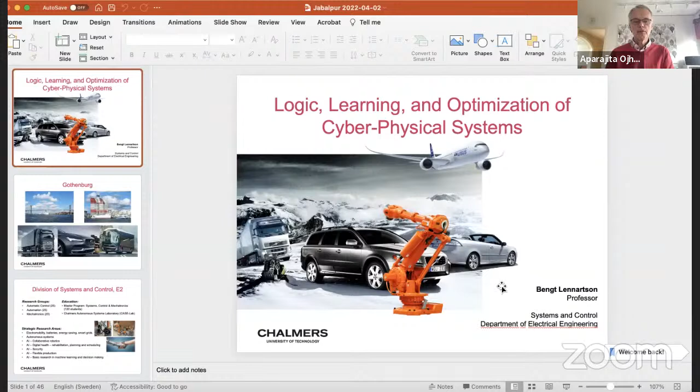Presentation view, at least in PDF, could be problematic. Let's see, now we have that. So although it's not so nice, let's see if it works if I start with the presentation mode here. Okay. So the title is instead Logic, Learning and Optimization of Cyber Physical Systems. I hope that sounds okay. Now it does not work to make the switch, so I have to go back. Let's try one more time, because it's of course better if I can use that mode. Now, okay, finally.

So, based on that title, I would like to start giving a very short presentation also of my city. Just one slide here. You see that we have the sea close to us, and also a lot of vehicle industry. We have actually 3 main contributors. Volvo Trucks is the second largest truck company in the world for heavy trucks. Volvo Cars is not so big, but it's still significant, and especially for safety functionality, it has been world leading, you can say. And it's interesting, when I go to Australia, for instance, I have been transported with a Volvo bus.

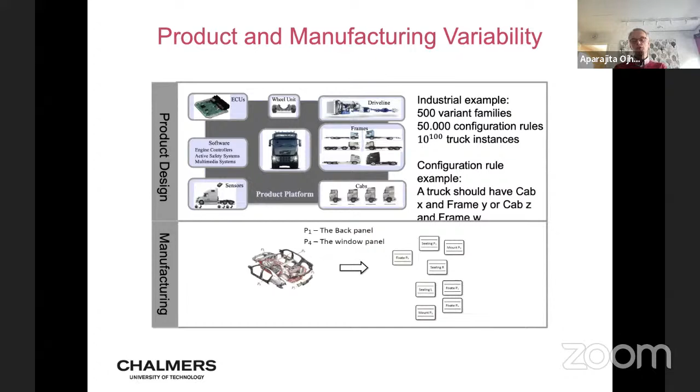In manufacturing, we are also focusing quite much on sequences of operations in factories, how to make that more systematic, how to get different views of operations from product view, production view, etc., to get a better understanding. So that was a little bit of a background, and now the question is, how can we support with some more basic methodology around this? One thing is temporal logic, which is a logic where we extend also with temporal modalities like always, eventually, next state, etc.

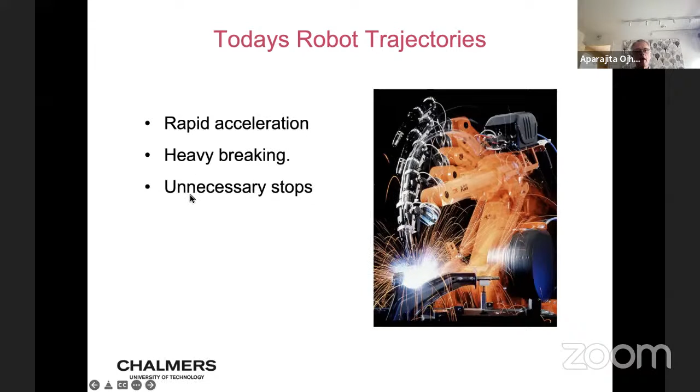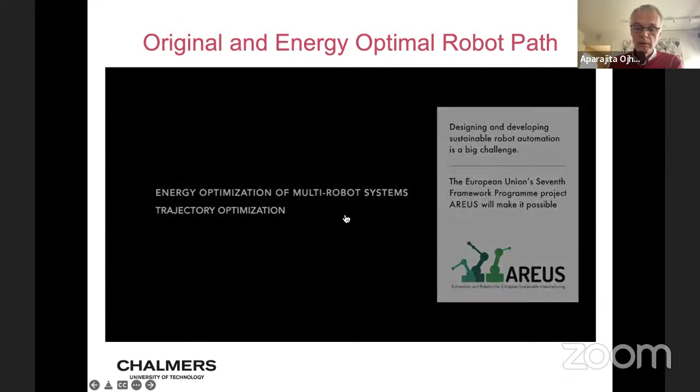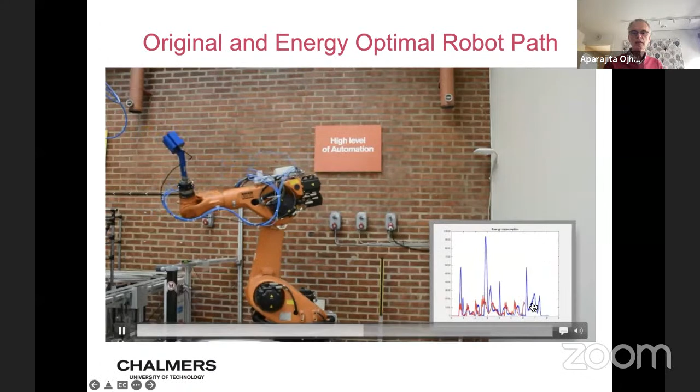And we can say that energy costs extra with rapid accelerations, heavy brakes, and unnecessary stops, and those should simply be avoided. So here I show you a movie, and it has some sound. Here you see the original programming of a KUKA robot, and you see some peaks here in the energy consumption. And then with our energy optimization, you get the red curve here, and you see that it goes much lower.

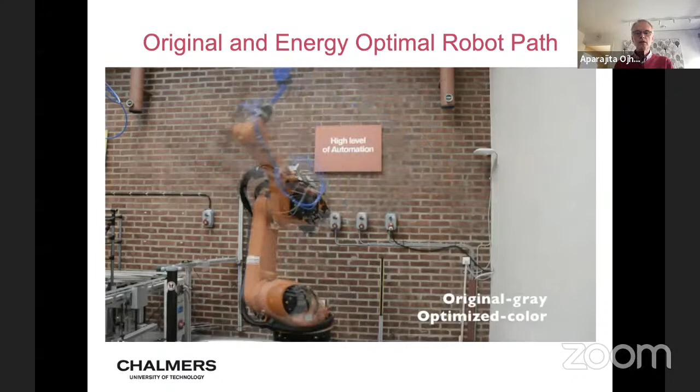Then I put these two solutions on each other, the original in gray and the optimized in color. You see, it's not that big a difference between them, but we save during the same execution time about 20 to 25% energy. And when we showed this to KUKA, they said, no, this cannot be true. It's something wrong you are doing. But we evaluated this extremely much, and in the end they accepted that yes, we have something here.

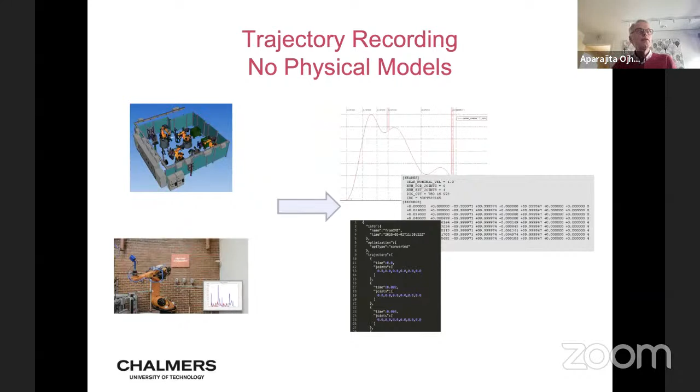So what we do is that we record the trajectory, the path, and then simply we look at the path and try to see how we can modify the update sampling of that path.

But before I come to that, you could see that the difference between the two solutions is that you go more quickly up to a constant velocity in the traditional one, and the acceleration is higher and then goes down to 0 and then goes negative in the original solution, and the optimal one goes up and then continuously goes down here. So you could say that this corresponds to a constant jerk instead.

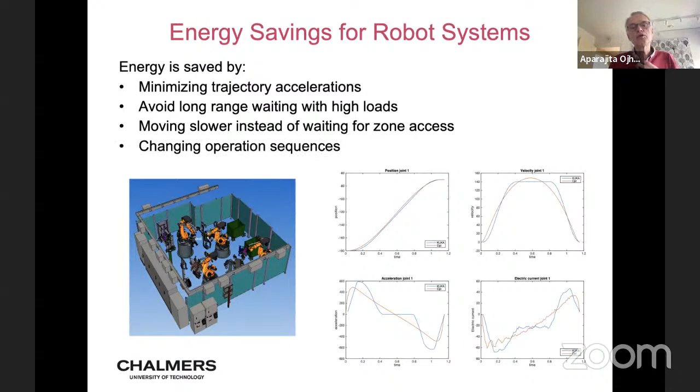So not so much difference, but it still gives significant reduction. And even more if you then also introduce stops and waiting times. I will come back to that in another video. So minimize the trajectory accelerations, avoid long waiting with high loads, and move slower instead of waiting for zone access. And also it's possible to change operation sequences.

To look at the coordination between different robots, we generate the zone where each robot is moving, and then we take the intersection between the zones for the different robots. This is a zone generation for the right robot, and you do the same for the second one. And in that way, you can get the intersection and have the shared zone. And then only one of the robots is allowed to go into that shared zone at a time.

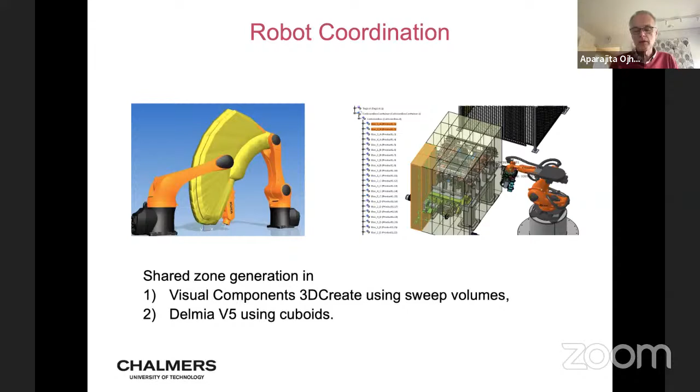And that means that you typically have to stop in front of that zone entrance, but instead you should go slowly to reach that zone, avoid waiting, and then just pass without stopping. That's another important aspect. And for time optimal and energy optimal, you see that the sequences of the individual operations could be a bit different, and those are also involved in the optimization.

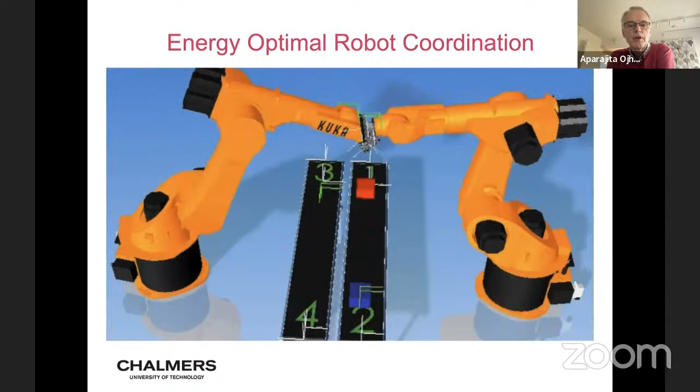Here I have not a physical robot, but an animation in our robot CAD software. Here you see that the robots now collide with each other. So then we should identify the collision zones, generate these zones and make the intersection, and then go into our software called Sequence Planner. And then we try the new solution, and let's see what happens.

Then they had to wait a little bit, and we got 25 to 35% reduction. So this is for robots. We think we have a unique solution here.

General Motors, they were not so impressed, because they said, well, okay, robots do not use so much energy, but for instance, Daimler, they showed much more interest in this, and that meant that we have had a big EU project on this topic together with Daimler, KUKA, and some other companies and universities in Europe.

So then optimization from more a mathematical point of view, or methodology and tool point of view. What can we do and what can we use? You could say that there are a number of different areas: operations research, where you have a lot of interesting tools like linear programming, mixed integer linear programming, mixed integer nonlinear programming. In artificial intelligence, we have A-star, tabu, genetic methods. And constraint programming is a part of AI, we can say, where there is extra focus on the logic

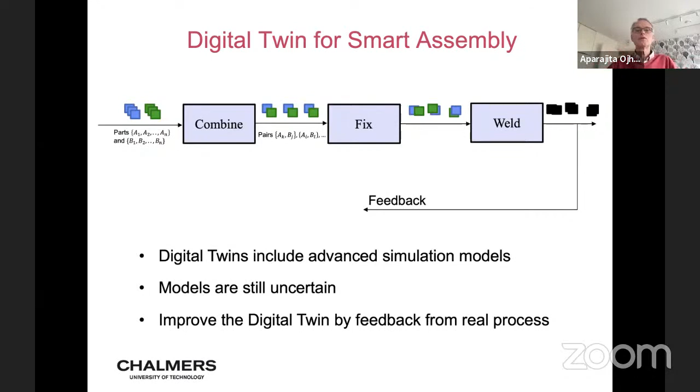And that's the kind of idea we have used in a so-called smart assembly process application, where we have plates that are welded together, and it's about the geometrical quality of those types of plates. So I think that is what I tried to say on this picture also.

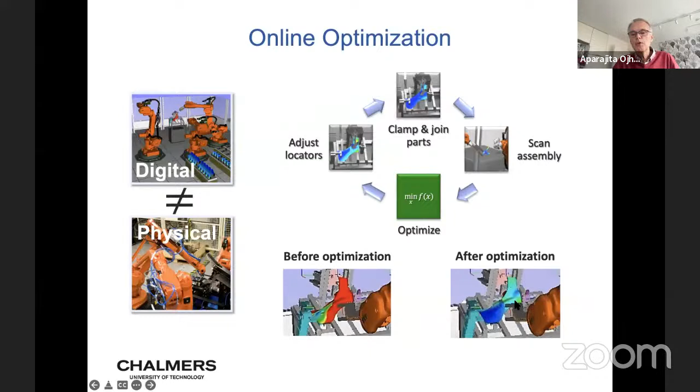So that was my presentation and summary. Complexity handled by incremental reduction - that was what I showed in the beginning based on this branching by simulation. Combining basic logic and smart search for efficient optimization based on this Z3-opt is another interesting alternative and complement to more traditional operation research methods.

Energy can definitely be reduced by optimization, and there we had an interesting proposal based on a given path, and then we tried to adjust the sampling updates to reduce velocity and accelerations especially.

Vision and machine learning has an interesting and great potential. We can improve this digital twin by reinforcement learning, and also the online update of the physical plant. There, it's also an interesting aspect, to just focus on the deviation between the model and reality and try to learn that deviation model or delta model. That is an idea we have not developed yet, but we have talked about it for some time, and I think we will soon start that activity.